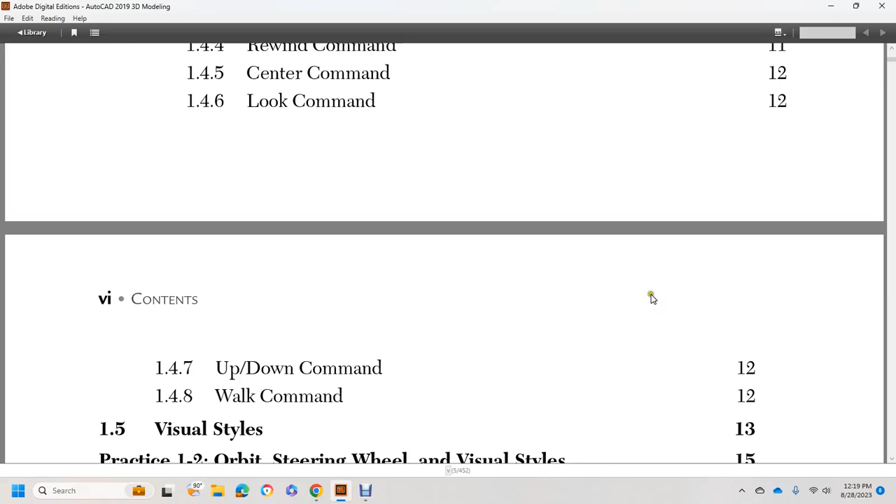Chapter 2, Creating Solids. Introduction to solids, 2.1, 2.2, creating solids using basic shapes: box command, cylinder command, cone command, sphere command, pyramid command, wedge command, torus command. Editing basic solid shapes using grips.

You edit basic solid shapes using quick properties and properties. 3D object snap, practice 2.1, basic solid shapes object snap.

2.6, using Boolean functions: union command, subtract command, intersect command, solid history. Using press pull command, 2.7. Practice 2.2, Boolean functions and press pull. 2.8, sub-objects and gizmos, culling, sub-object selection cycling, selecting user preset views.

Chapter 2, Creating Solids. In this chapter, we cover the 7 basic shapes, manipulating solids, the press pull command, 3D object snaps, and sub-object gizmos.

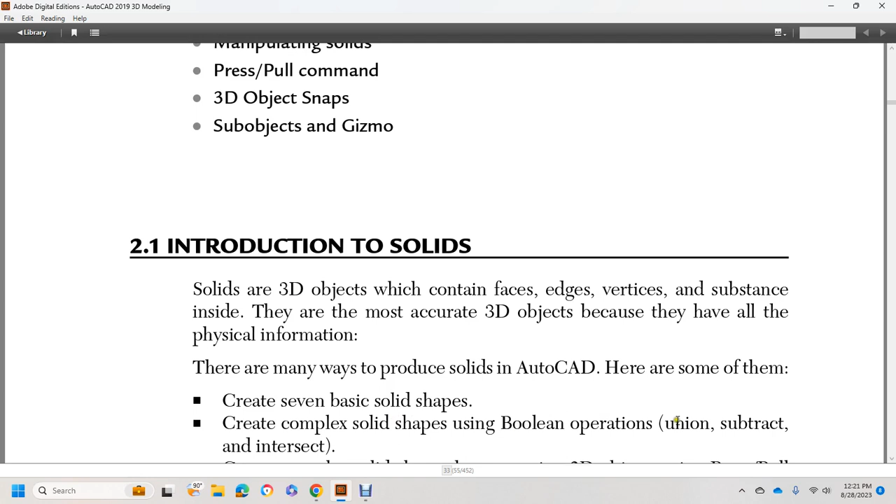Here are some of them: creating 7 basic solid shapes, creating complex solid shapes using Boolean operations (union, subtract, and intersect), creating complex solid shapes by converting 2D objects using the press and pull command, and creating complex solid shapes using sub-objects and gizmos. 2.2, creating solids using basic shapes.

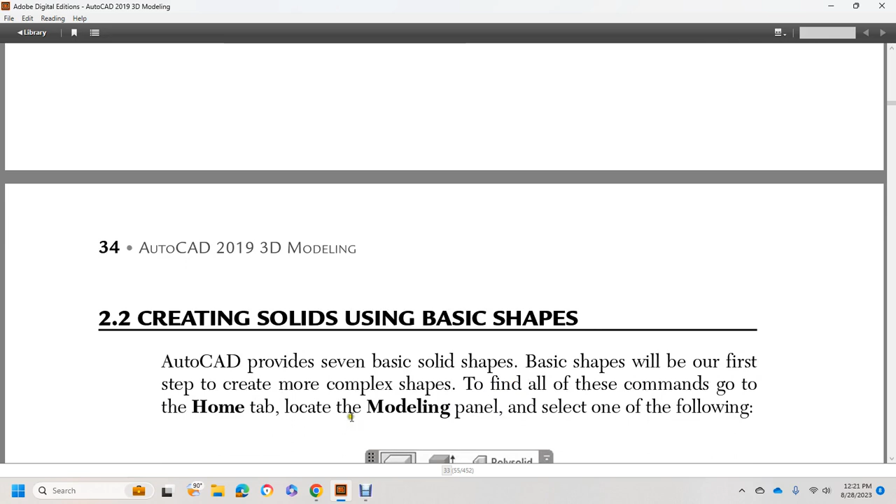AutoCAD provides 7 basic solid shapes. Basic shapes will be our first step to creating more complex shapes. To find all these commands, go to the Home tab, locate the Modeling panel, and select one of the following: box, cylinder, cone, sphere, wedge, pyramid, or torus. Here's a discussion of each command.

2.2.1, the box command. This command will allow you to create a box or cube. Choose the box command. Following the prompts, you will specify the first corner or center, specify the other corner or cube length, then specify height and/or 2 point.

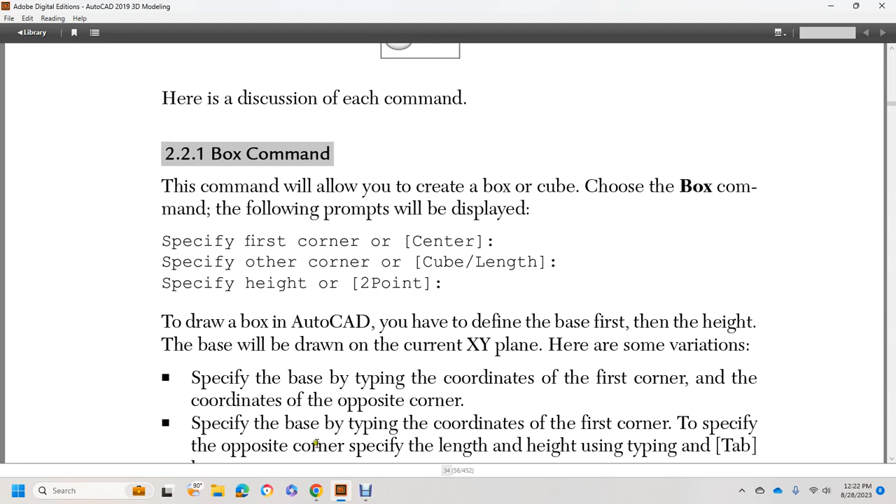To draw the box in AutoCAD, you have to define the base first, then the height, and the base will be drawn on the current XY plane. Here are some variations: specifying the base by typing coordinates of the first corner and of the coordinates of the opposite corner, or specifying length and height using the Tab key.

Specify the base by typing coordinates of the first corner, then type to specify the opposite corner. Specify the length and height using typing and the Tab key. Specify the base by specifying the first corner and length, then specify x-axis direction and width in the y-axis direction. Specify the base by specifying the first corner, then specify with the cube option. AutoCAD will ask you to input one dimension for all sides: length, width, and height.

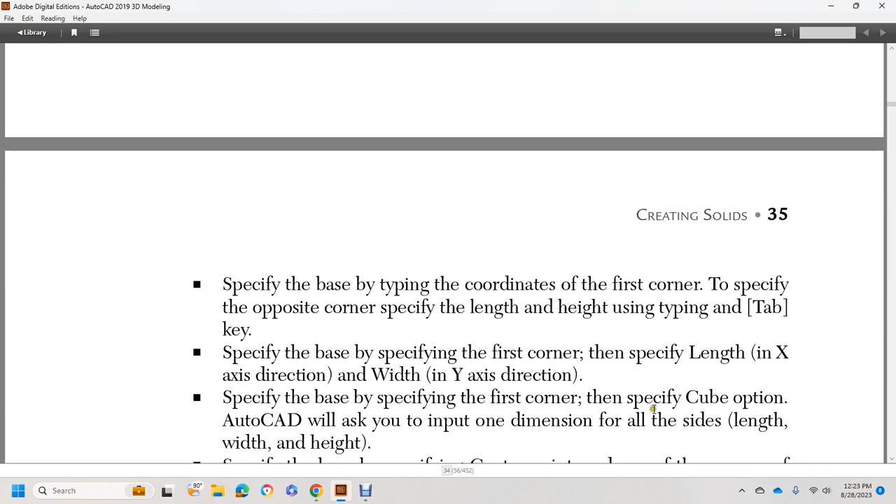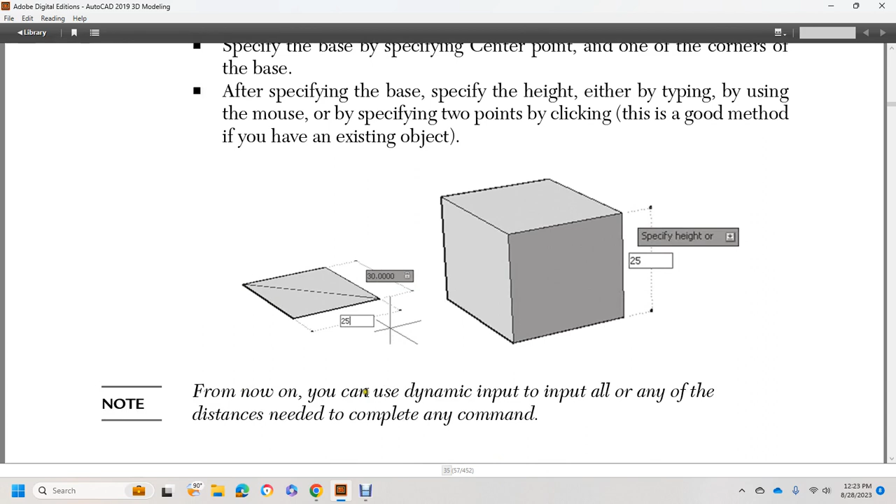Specify the base by specifying the center point, one of the corners of the base. After specifying the base, specify the height either by typing, using the mouse, or by specifying 2 points by clicking—this is a good method if you have an existing object. So here we looked at a cube. From now on, you can use dynamic input to input any of the distances needed to complete a command.

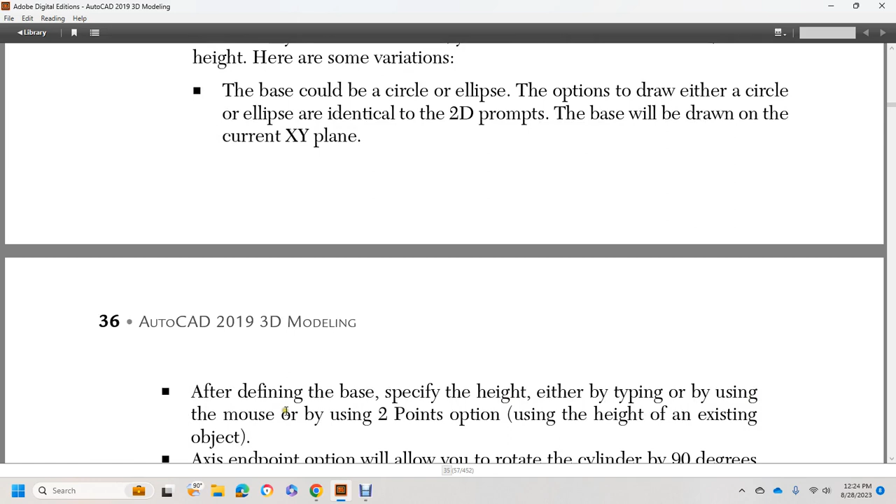Here are some variations: the base could be circular or ellipse. The options to draw either circle or ellipse will be identical to the 2D prompts. The base will be drawn on the current XY plane. After defining the base, specify the height either by typing or using the mouse, or by using the 2 points option using the height of an existing object.

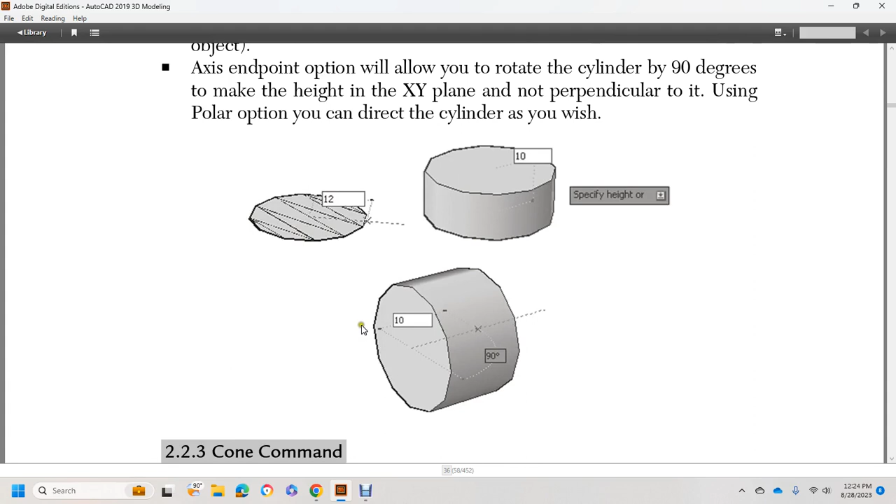The axis endpoint option will allow you to rotate the cylinder by 90 degrees, making the height not perpendicular to the XY plane. Using polar input, you can direct the cylinders as you wish. So we made our base and then pulled it and rotated it 90 degrees at the axis.

Cone command. This command will allow you to create a cone. Choose the cone command and the following prompts will display: specify center point of the base, 3-point, tangential radius, elliptical. Specify base radius or diameter. Specify height or 2-point axis, endpoint, top radius.

Cone and cylinder have identical prompts, so we won't discuss them again except for one thing: the cone command will allow you to draw a cone with a top radius.

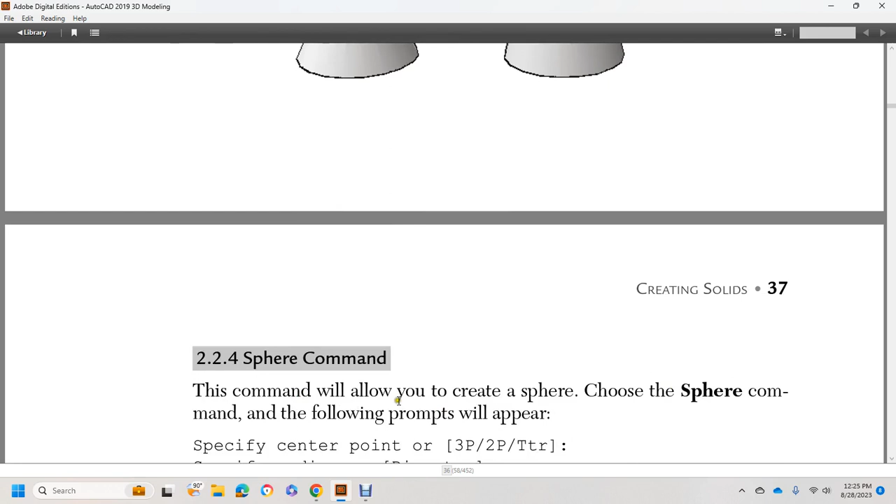Sphere command. This command will allow you to create a sphere. Choosing the sphere command, the following prompts will appear: specify center point, 3 point, tangential radius, specify radius and diameter. The prompts are identical to the circle command.

2.2.5, the pyramid command. This command will allow you to create a pyramid. Choose the pyramid command and the following prompts will appear: four-sided circumscribed, specify center point of base, edges, and sides, specify radius, base radius, or inscribed height, specify height or 2 point axis, end point, top radius.

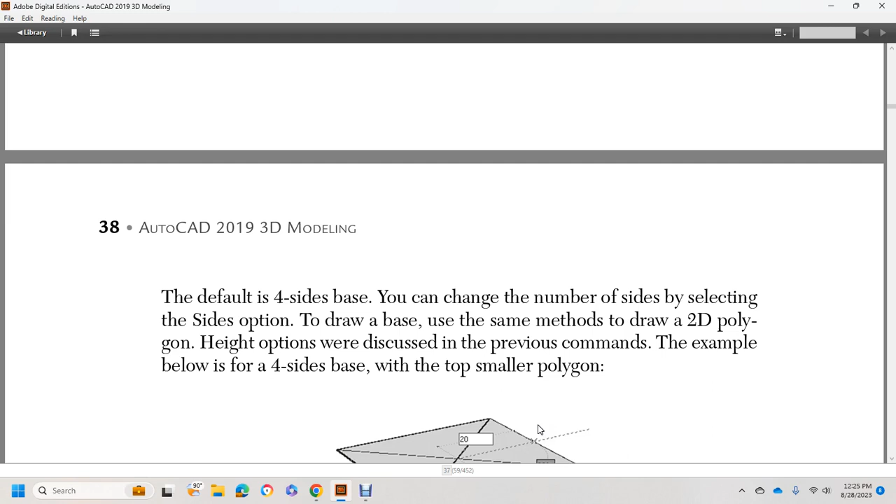Default is a 4-side base. You can change the number of sides by selecting the side option. Draw the base using the same method as drawing a 2D polygon. Height options were discussed in previous commands. These examples below show a 4-sided base for the top, smaller polygon.

2.2.6, the wedge command. This command will allow you to create a wedge. Choose the wedge option and the following prompts will be displayed: specify first corner center, specify other corner cube or length, specify height or 2 points.

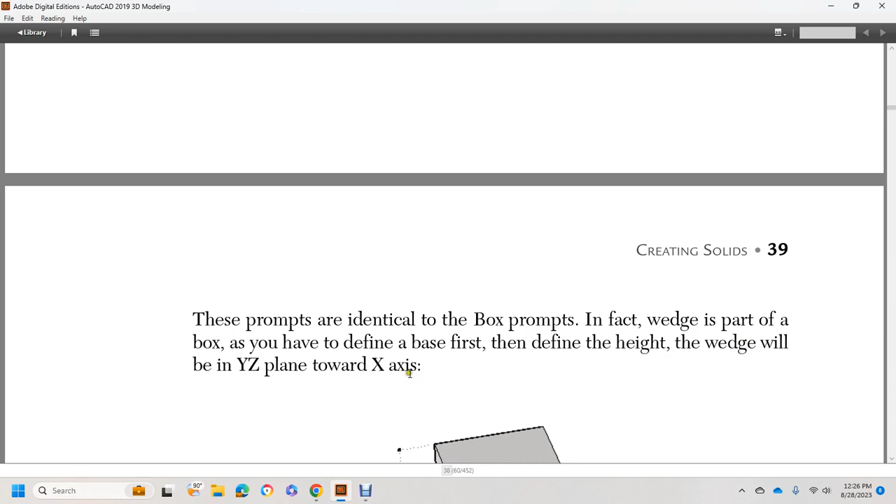These prompts are identical to the box prompt, and in fact the wedge is part of a box. If you define the base first, then to define the height, the wedge will be in the YZ plane toward the X-axis. So here's a wedge.

2.2.7, the torus command. This command will allow you to create a torus. Choosing the torus option, the following prompts will appear: center point, specify center point, 3 point, TTR, specify radius, diameter, tube radius, and specify tube radius or 2 point diameter. Specify center and radius diameter of the torus, and specify the radius or diameter of the tube.

Check the following illustration showing the tube diameter and the torus diameter.

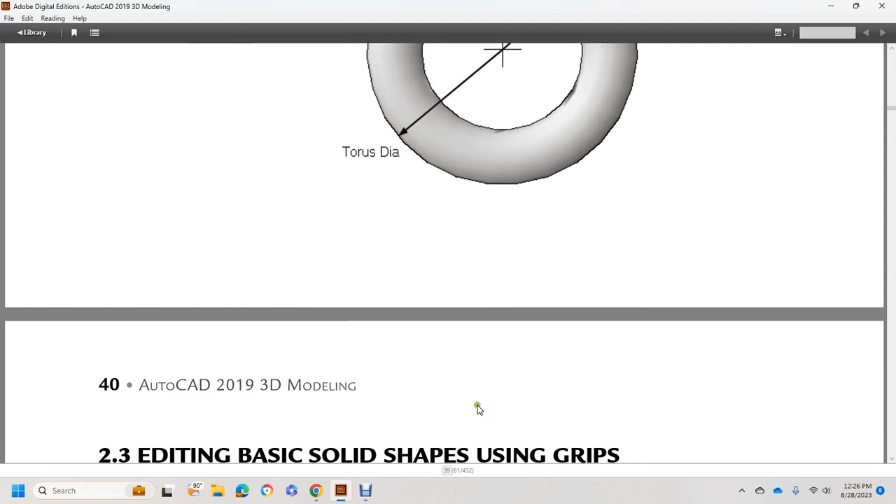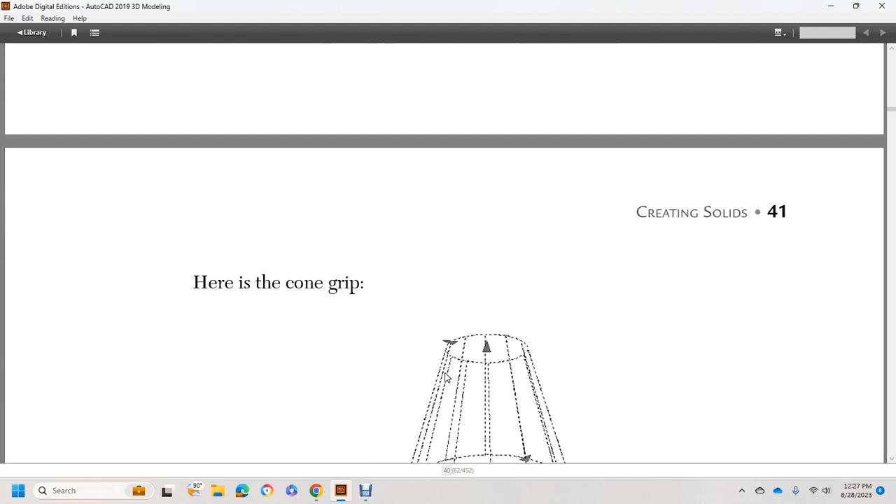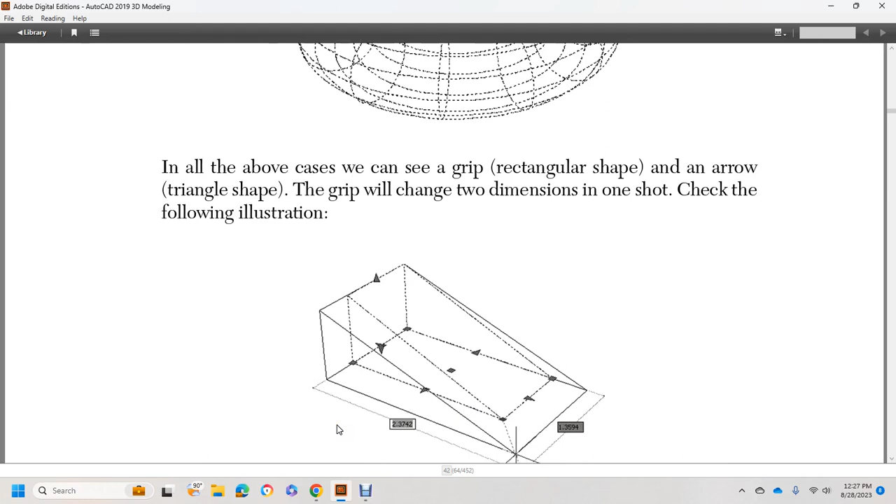In all the above cases, we can see that the rectangular-shaped grip and the arrow-shaped triangular grip will change 2 dimensions in one shot. Check the following illustration showing that with the rectangular shape and the arrow with the triangular shape, the grip will change 2 dimensions in one shot.

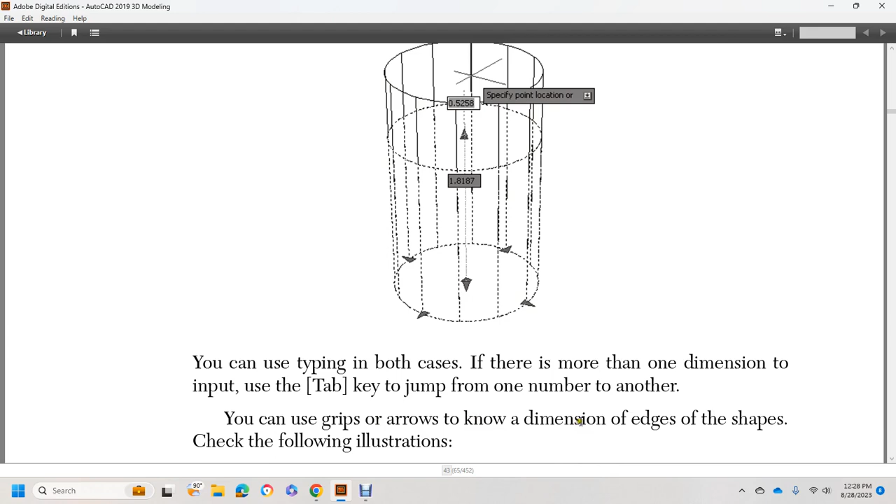The arrow will change dimension in one direction like the following. You can use both cases if there's more than one dimension to input. Use the tab key to jump from one to another. Using grips, arrows allow you to dimension edges and shapes. Check the following illustrations.

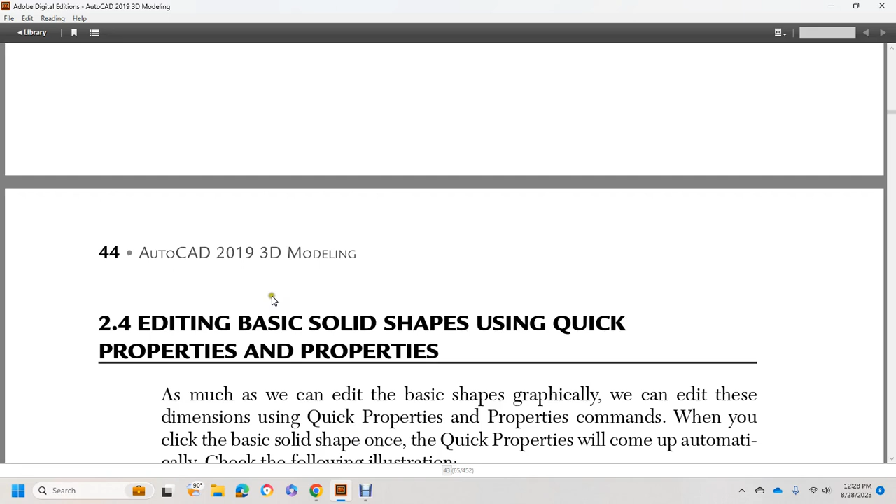2.4, editing basic solid shapes using quick properties and properties. As much as we can edit basic shapes graphically, we can also edit these dimensions with the quick properties command. When you click the basic solid shape once, quick properties will come up automatically. Check the following illustration: color, layer, elliptical radius, and height, and that it's a 3D solid.

The above is a cylinder shape. You can change the radius and height, and change the base from being a circle to an ellipse. To activate Properties, select the desired shape, right click, then select the property option.

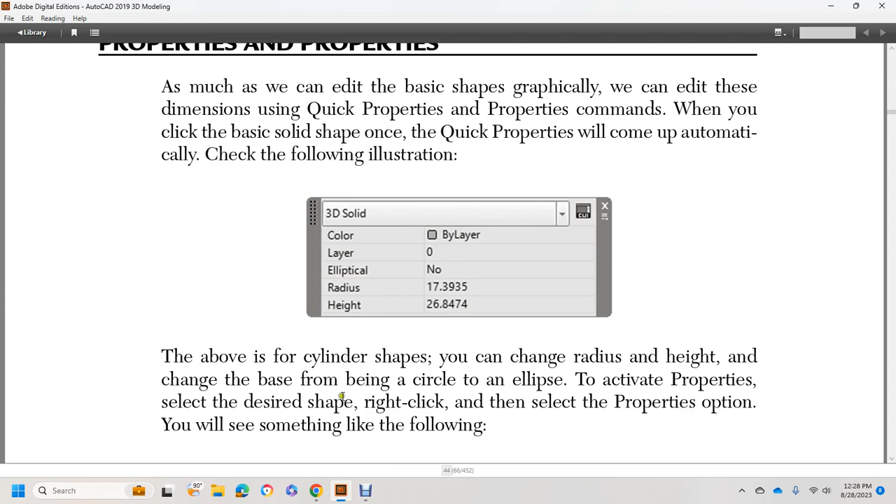You'll see something like the following: 3D solid, general color, layer, line type, scale, plot type, line weight, transparency, hyperlink, visualization material by layer, solid type, position X, Y, Z, elliptical radius and height, solid history, and show history.

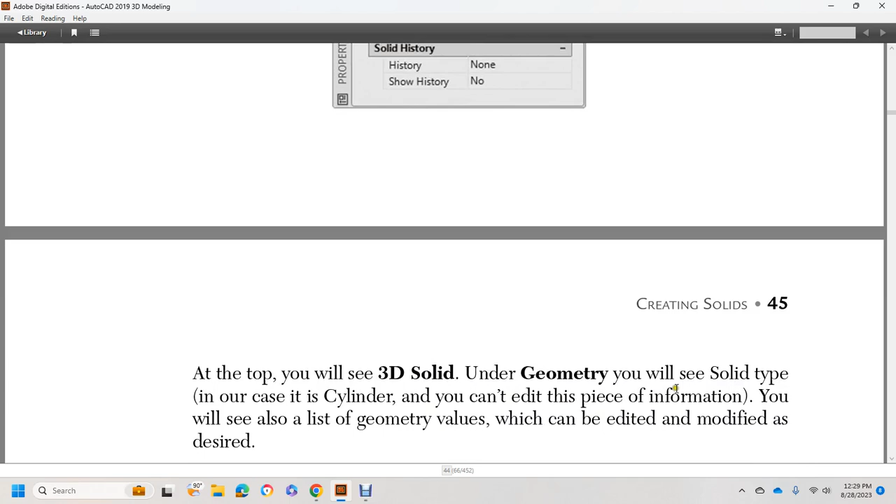At the top, you'll see 3D solid. Under geometry, you'll see solid type, which in our case is cylinder. You can't edit this piece of information. You will also see the list of geometry values, which can be edited and modified as desired.

2.5, 3D Object Snap. The 3D Object Snap is similar to Object Snap, but only works with 3D objects. It will help you snap onto 3D objects. As a first step, you switch 3D Object Snap on and off from the status bar, which snaps the cursor to 3D references.

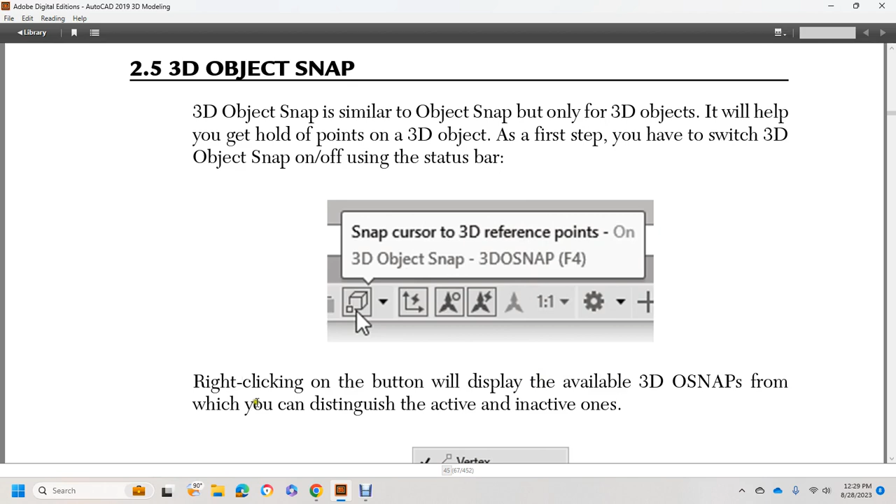The shortcut key is F4, command name 3D OSnap. Right clicking on the button will display the 3D OSnap options, from which you can distinguish the active and inactive ones: vertex, midpoint, center, face, knot, perpendicular, nearest to face, and object snapping settings.

Select the settings option and you will see the following dialog box: snap grid, polar track, object, 3D object snapping. 3D object snapping on, shortcut key F4: vertex, midpoint, center, face, knot, perpendicular, nearest to face, point cloud, node, intersection, edge, corner, nearest to plane, perpendicular, edge, center line. OK, cancel, help. You can turn on and off the desired modes.

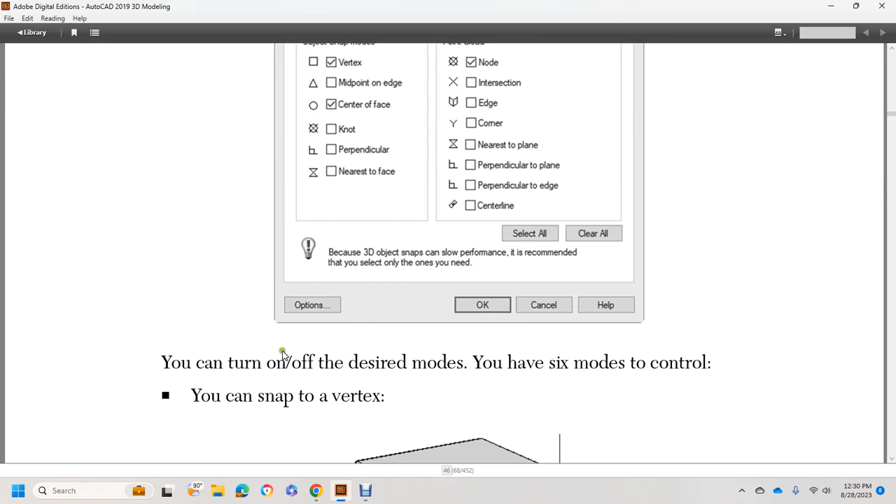You have 6 modes to control. You can snap to a vertex.

You can snap to a midpoint on the edge. You can snap to a center of the face. You can snap to a knot or a spline. You can snap to a point perpendicular to the face. You can snap to a point very nearest to your selected point.

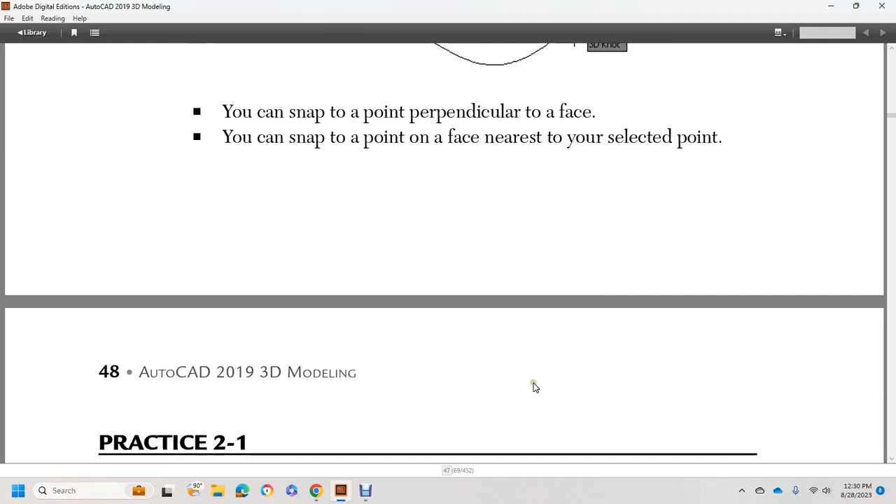Practice 2-1: Basic solid shape 3D object snaps. Start AutoCAD 2019, open practice 2-1 drawing file. Create a pyramid with 4 base sides, circumscribed radius 30 at top, side radius 15, height 25.

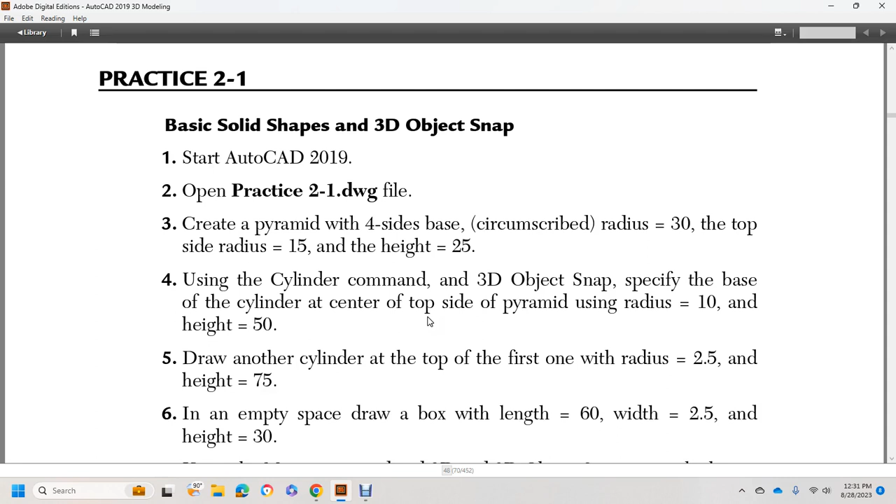Using the cylinder command with 3D object snap, specify the base of the cylinder at the center of the top side of the pyramid, using radius equal 10, height 50. Draw another cylinder on top of the first one, radius 2.5, height 75. In empty space, draw a box with length 60, width 2.5, and height 30.

Using the move command with 3D object snap, move the box to the upper cylinder to get the following result - it kind of looks like a flagpole.

Using any of the edit methods, change the radius of the top cylinder to be 5, change the width of the box to 5, save and close.

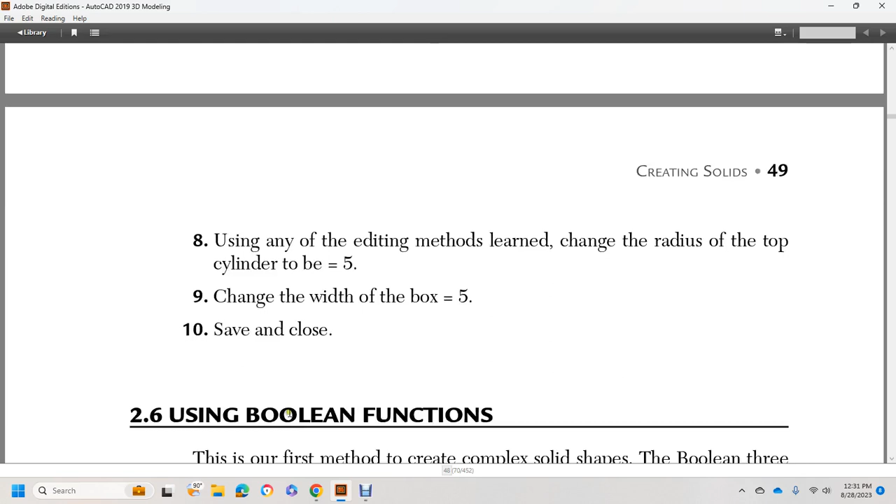Using Boolean functions - this is our first method to create complex solid shapes. The 3 Boolean functions are union, subtract, and intersect. To issue these commands, go to the home tab, locate the solid editing panel - the 3 buttons to the left of the target are shown below: extract edges, extrude faces, separate.

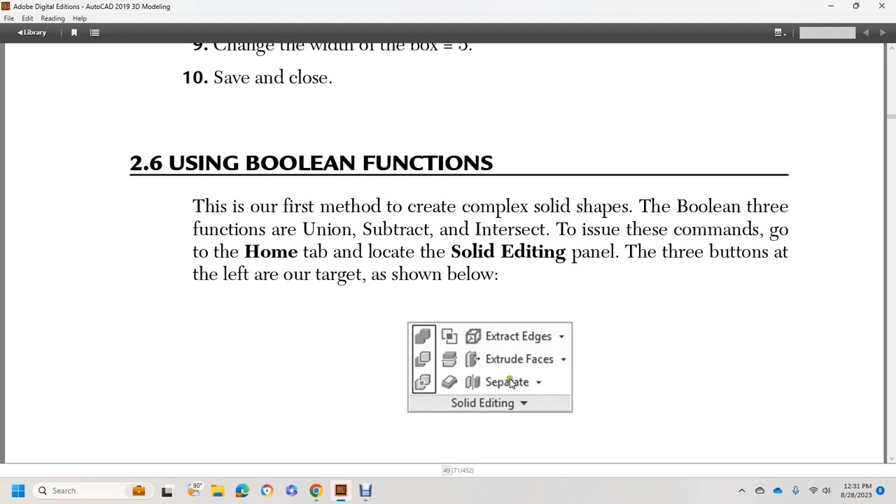The union command will allow you to union all selected solids and surfaces into a single object. You can pick up the objects in any order you want, then press enter. Check the following example showing before union and after union.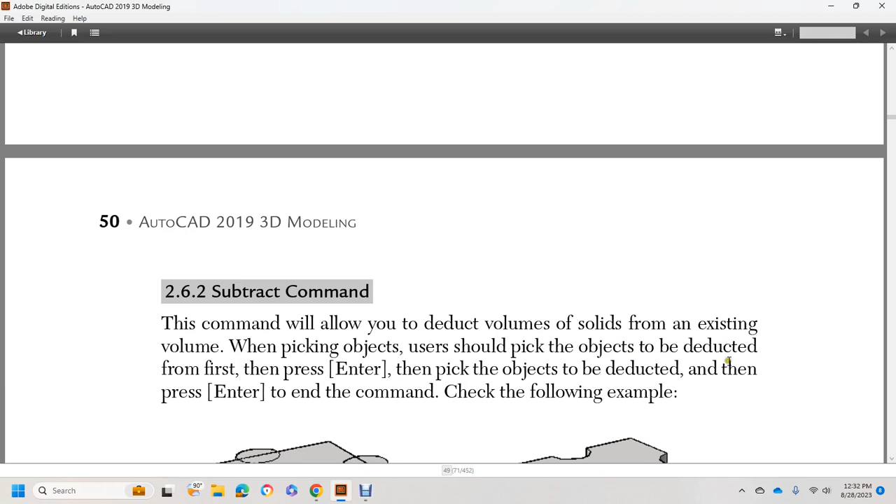The subtract command will allow you to deduct volume solids from an existing volume. When picking objects, you should pick the objects to be deducted from first, then press enter, then pick the objects to be deducted, then press enter to complete the command. Check the following example showing before and after subtraction.

The intersect command will find and create the common volume between 2 solids or more. Pick the solids in any order you want. Check the following example.

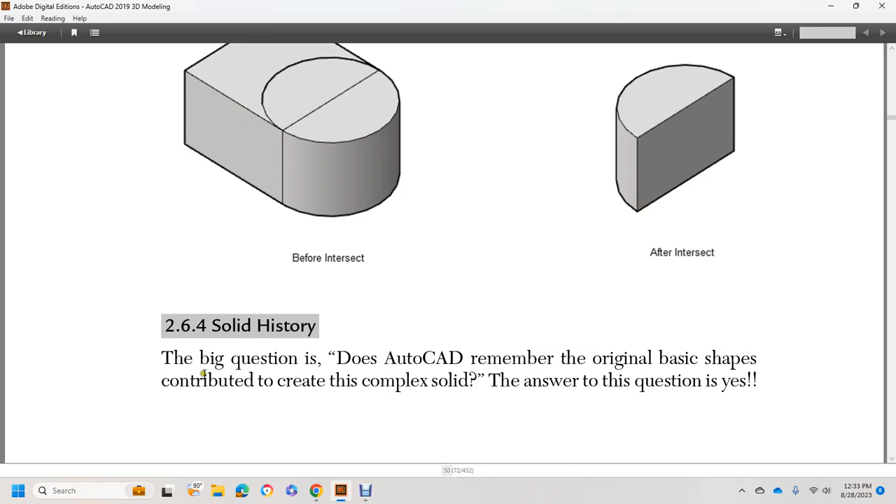Before intersection, after intersection - solid history. The big question is, does AutoCAD remember the original basic shapes that contributed to creating the complex solid? The answer is yes. In order to succeed with this, you should use the following steps.

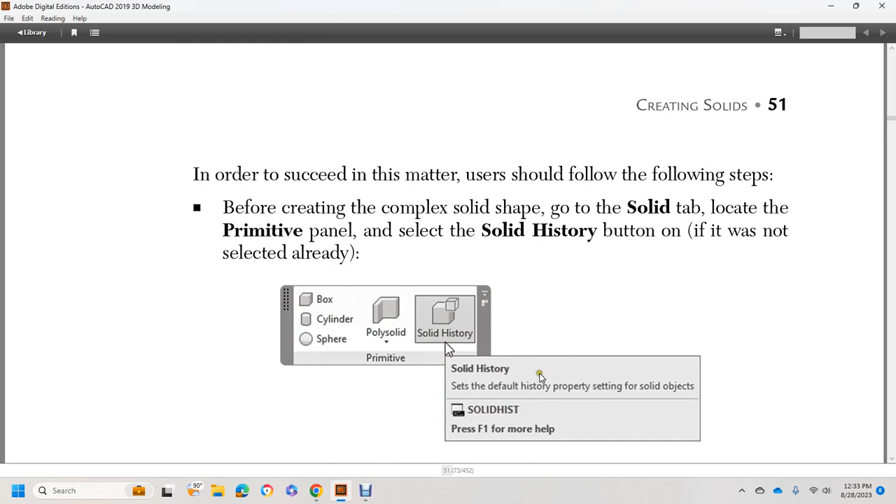Before creating complex solid shapes, go to the Solid tab, locate the primitive panel, select the Solid History button if it was not already selected. Solid history, as in the command SOLIDHIST, sets the default history setting for solid objects. Create your complex solid shape, then select the complex solid to access its properties palette.

Under solid history, make sure that history equals record. Check the following illustration: solid history equals record, show history equals no.

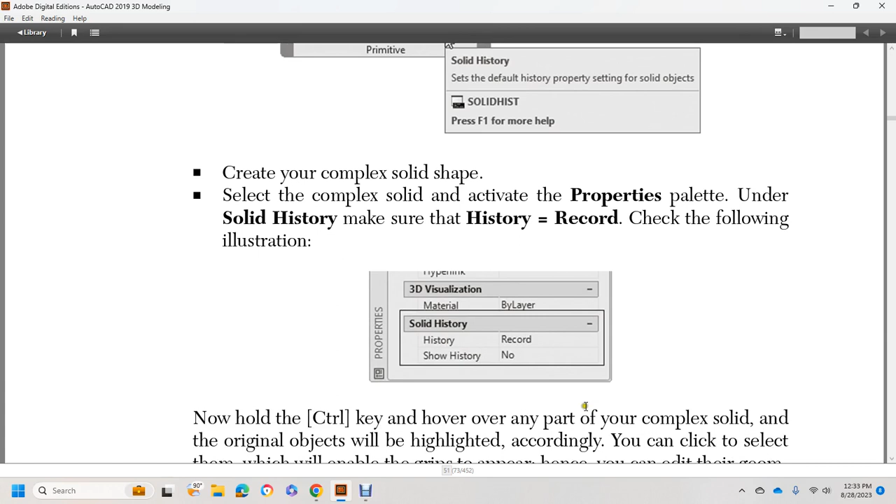Now hold the control key and hover over any part of the complex solid - the original object will be highlighted accordingly. You can select them, and it will engage the grips to appear, and hence you can edit the geometry values. Check the following illustration.

Using properties, if you see that show history equals yes, all solids that contributed to creating the complex solid will be displayed, but unfortunately the user can't edit them in this state. To edit them, you need to hold the control key as we did previously. Check the following illustration.

2.7 - Using the press pull command. The press pull command is a very handy command which will help you create 3D solids on the fly. The user can do one of the following procedures.

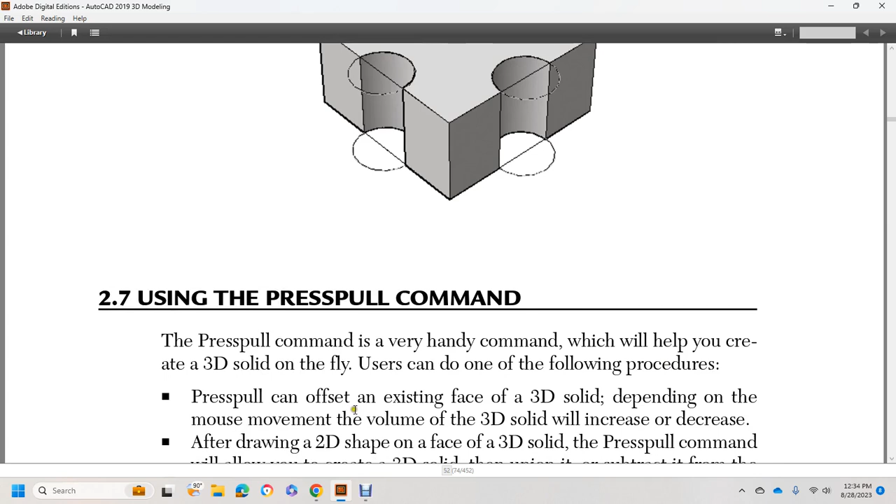Press pull will offset an existing face of a 3D solid depending on the mouse movement - the volume of the 3D solid will increase or decrease. After drawing a 2D shape on the face of a 3D solid, the press pull command will allow you to create a 3D solid to union or subtract it from the existing 3D solid.

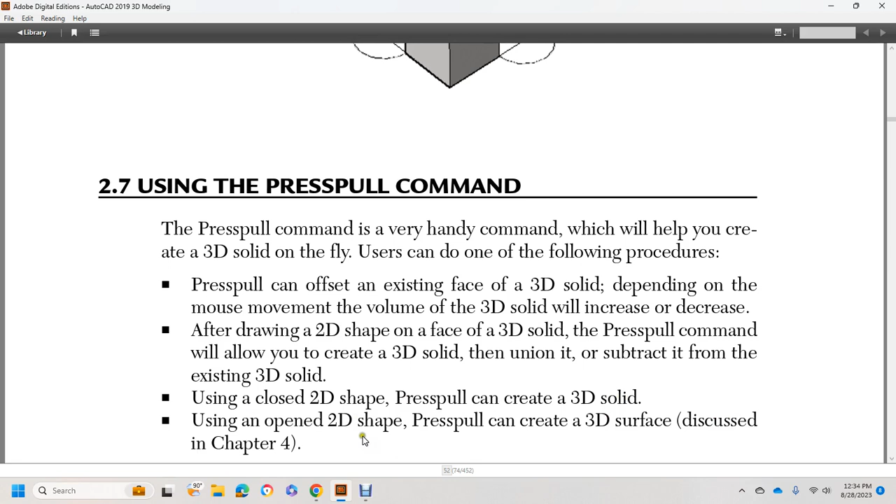Using a closed 2D shape with press pull creates a 3D solid. Using an open 2D shape with press pull creates 3D surfaces, discussed in Chapter 4. The press pull command has multiple options.

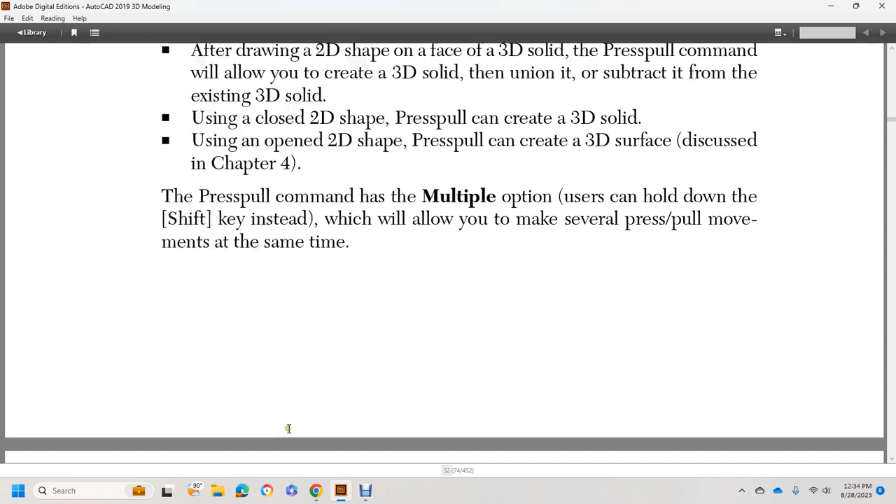The user can hold down the shift key instead, which will allow them to make several press pull movements at the same time. To issue the command, go to the home tab, locate the modeling panel, select the press pull button - the command is PRESSPULL.

Press pull on bounded areas - you'll see the following prompts: select object or bounded area, specify extrusion height or multiple. The command will keep repeating these 2 prompts until you end it by pressing enter.

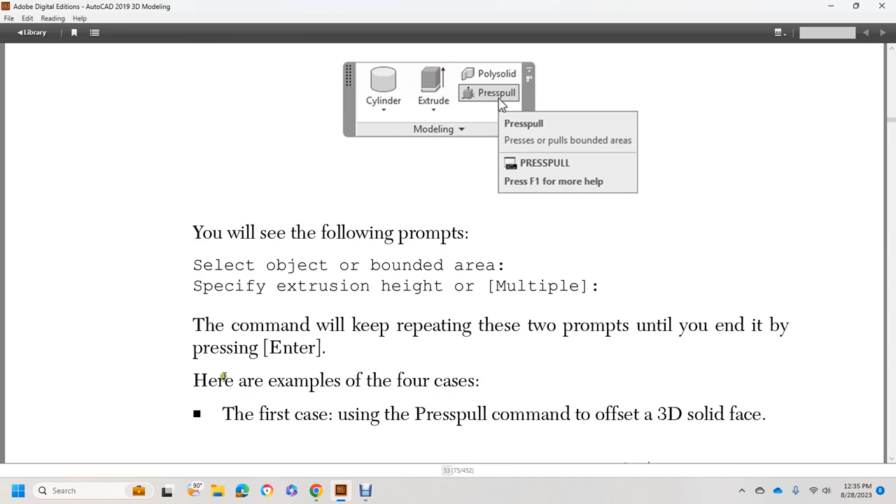Here are examples of the 4 cases. The first case uses the press pull command to offset a 3D solid face. Specify the extrusion height, and then you have the little X mark on your triad.

Second case: after drawing a 2D object on a 3D solid face, you can press pull the 2D shape to add or remove volume using the press pull tool on a 3D solid.

Third case: press pull a closed 2D object to produce a 3D solid.

Fourth case: press pull an open 2D object to produce a 3D surface.

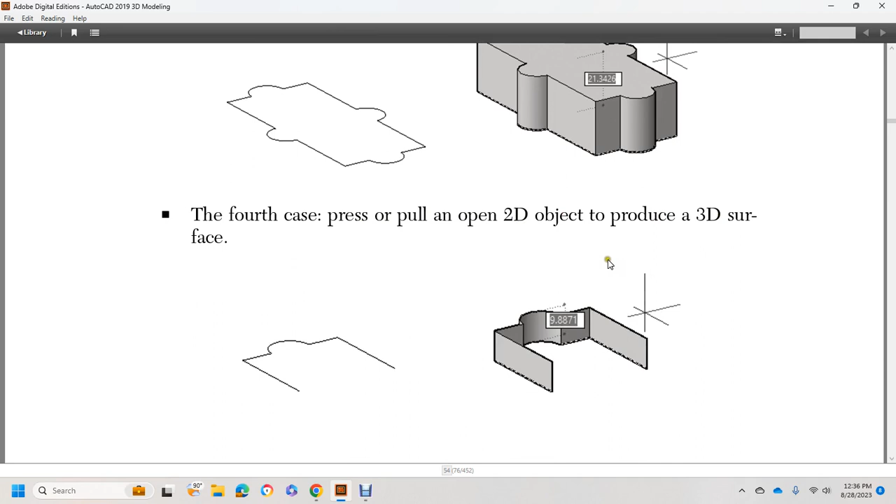Using multiple options, you can hold the Shift key to select several objects—open 2D, closed 2D, or 3D solid face—and press pull them all in one shot. You can use the Control key to control the output of the command.

Let's see the following example: without holding the Control key, and then holding the Control key. In the first case, the press pull offsets the face perpendicular to the existing face. While holding the Control key, press pull offsets following a taper angle.

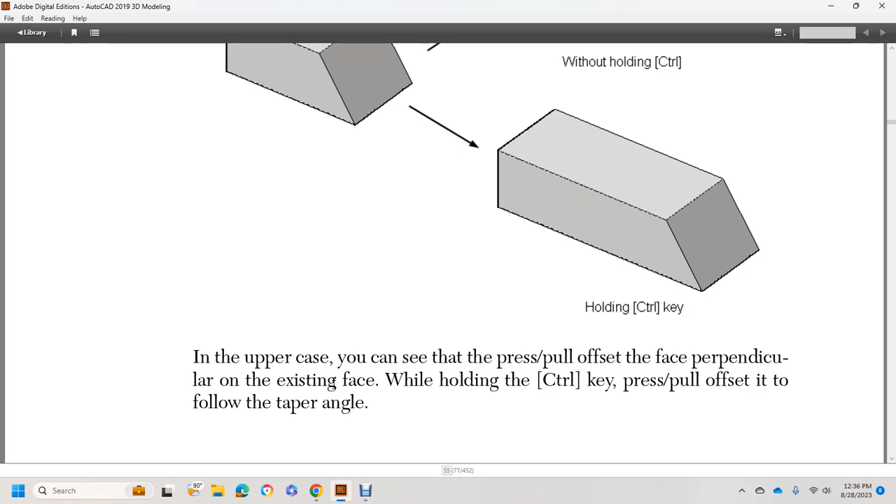Practice 2-2, Boolean functions: press pull. Start AutoCAD 2019 and open the practice 2-2 drawing file.

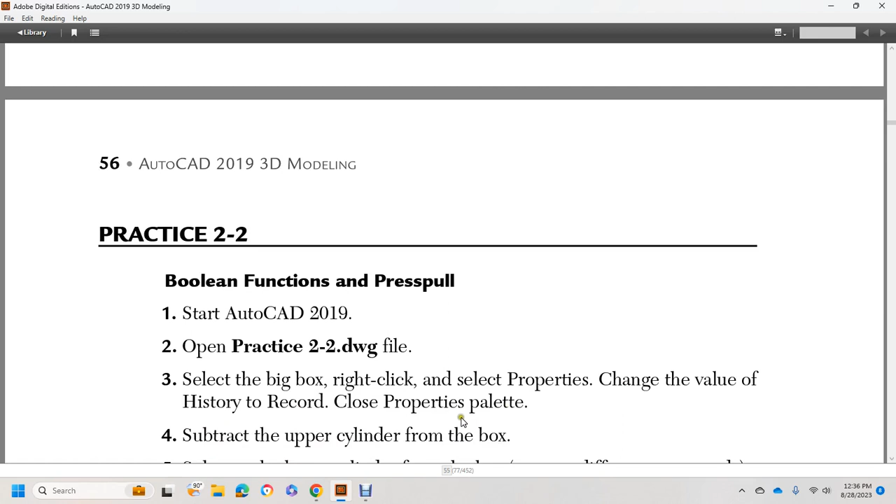Select the big box, right click, select Properties, and change the value of the history record in the Properties palette. Subtract the upper cylinder from the box, then subtract the lower cylinder from the box.

This is 10 units added to the current radius. You use the same technique for the lower cylinder, also 10 units, but this time you remove 10 units from the current radius.

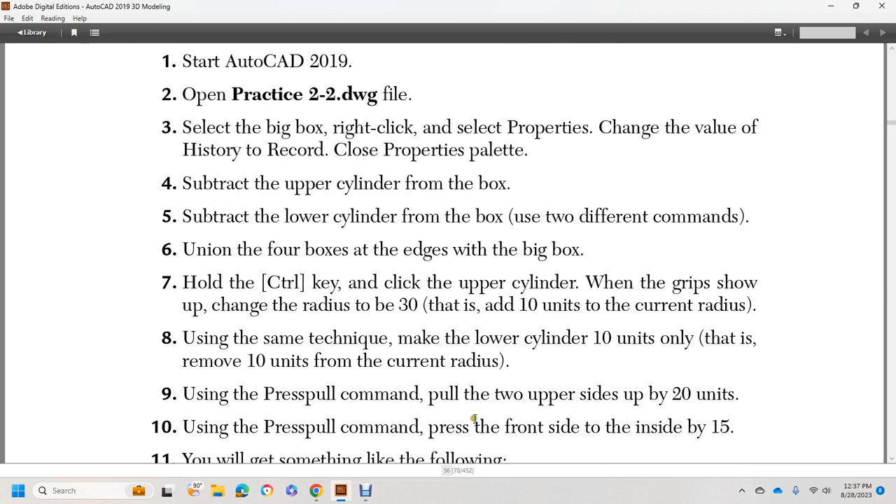Use the press pull command to pull the two upper sides up by 20 units. Using the press pull command, press the front side inside by 15. You'll get something looking like the following.

You need to use Subtract. Then with the press pull command, pull the two rectangles on the left side outward by a distance of 15.

Using the press pull command, pull the open shape up by 60 units. Select the new shape type. This is the final shape. Save and close the file.

2.8: sub-objects and gizmos. A sub-object is any part of a solid—it can be a vertex, edge, or face. A gizmo is a gadget that helps you move, rotate, and scale selected vertices, edges, and faces.

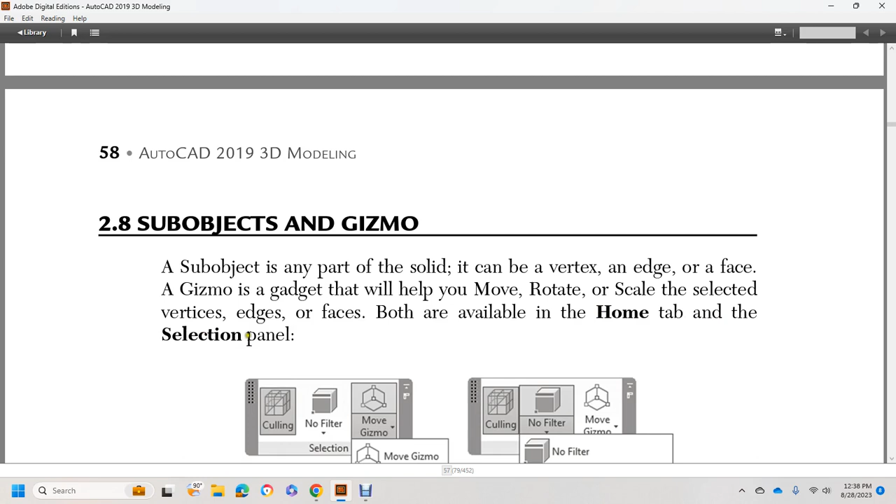Both are available in the Home tab, Selection panel, showing culling, no filter, and selection gizmo options. You have Move gizmo, Rotate gizmo, Scale gizmo, No gizmo, and then a filter for vertex, edge, face, solid history, and drawing view component.

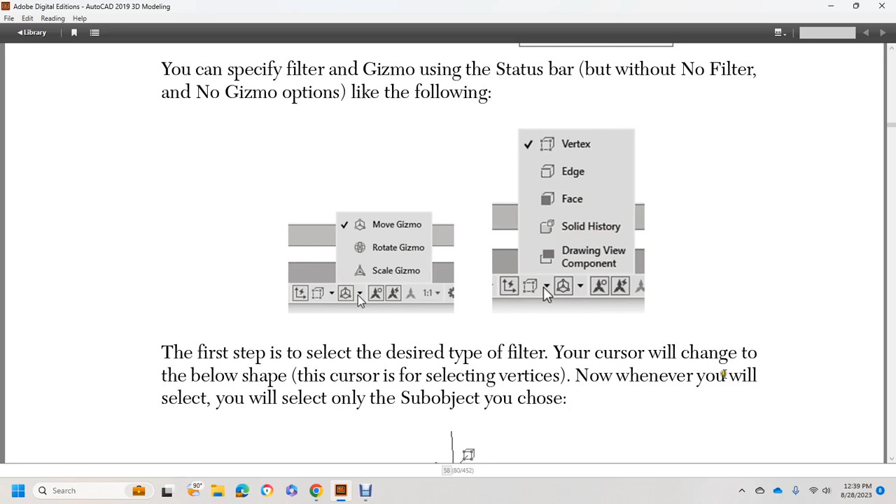Your cursor changes to select the below shape; it's now selecting the vertex. Whenever you select, you will select only the sub-objects you choose—for example, vertices, edges, and faces.

When selecting, there are three things you can take care of, the following being culling. Culling is a very useful feature—it allows you to select only sub-objects visible from the current viewpoint.

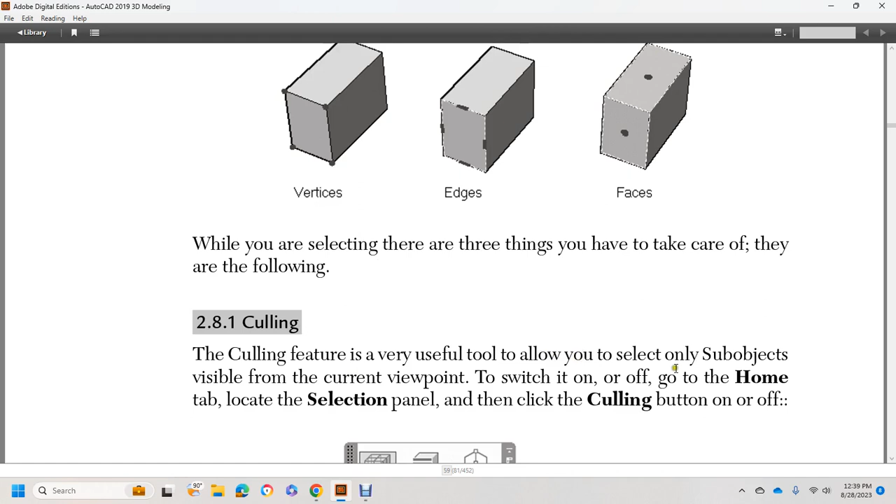To switch it on and off, go to the Home tab, locate the Selection panel, and click the Culling button on and off—this controls whether objects are hidden from view or highlighted when you roll over them. The command is CULLINGOBJ; press F1 for more help.

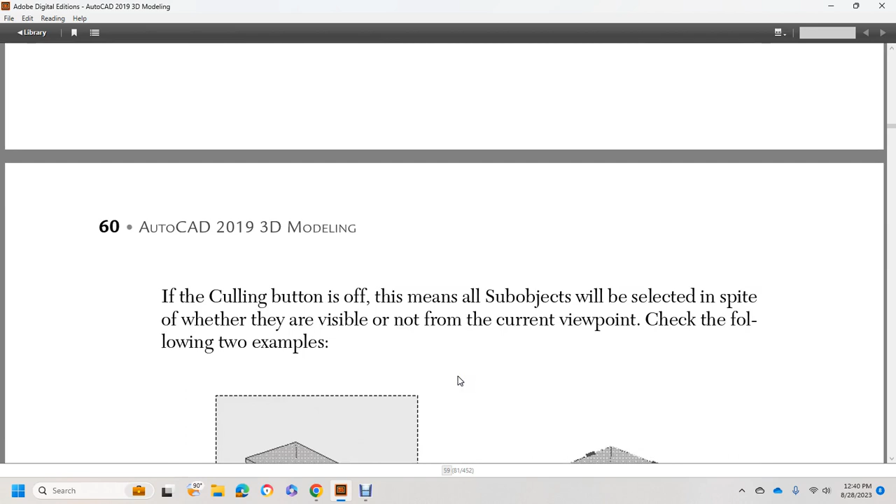When the Culling button is off, sub-objects will be selected regardless of whether they are visible from the current viewpoint. Checking the following two examples: with culling on, we have all these edge points.

With culling off, you have a different set of edges.

Selection cycling: when you click on a face, you may have another face behind it. AutoCAD will allow you to pick exactly what you intended to select, showing a small window called the Selection list, which includes all objects that exist in the same space as the click.

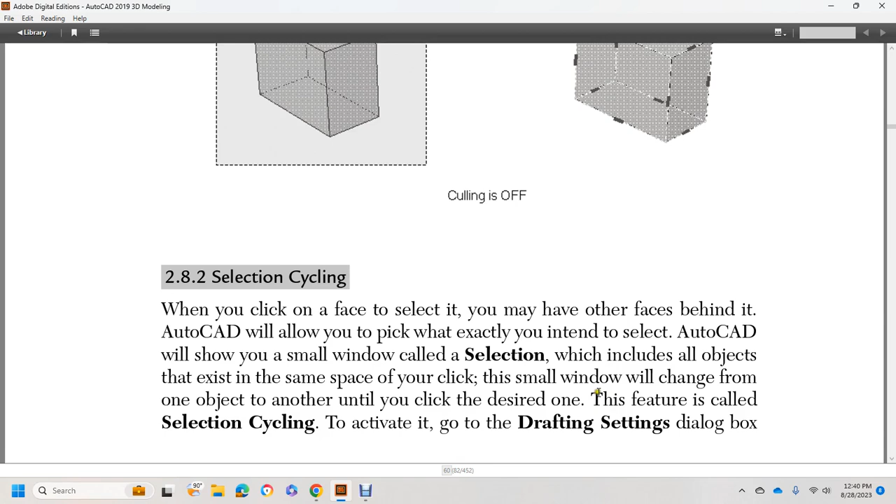The small window will change from one object to another until you click the desired one. This feature is called Selection Cycling; to activate it, go to the Drafting Settings dialog box, which also controls Snap, Grid, Osnap, and select the Selection Cycling tab.

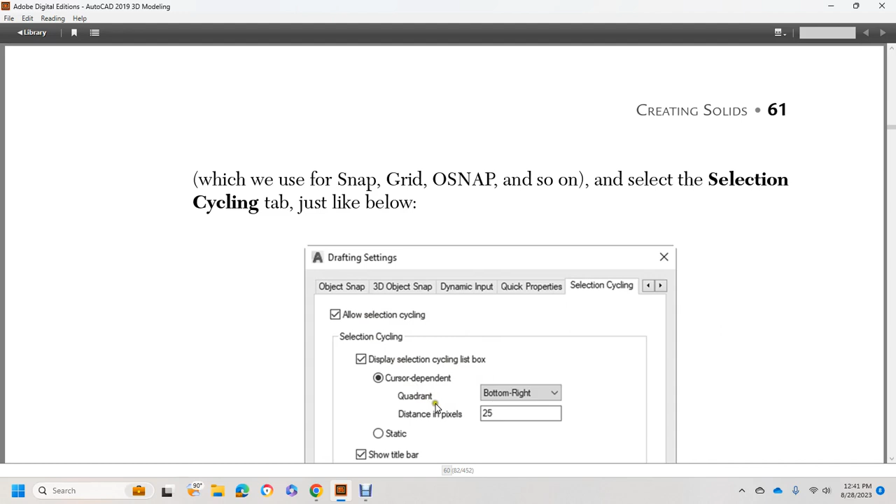We go to Drafting Settings and look at Selection Cycling: allow selection cycling, display selection cycling list box options like cursor dependent, quadrant bottom right, distance in pixels, static, and show bar, then Options, OK, and Help.

Here's an example: assume you have a pyramid and click the top face as shown. Once we've made our selection, it shows solid faces 1 and 2, and none.

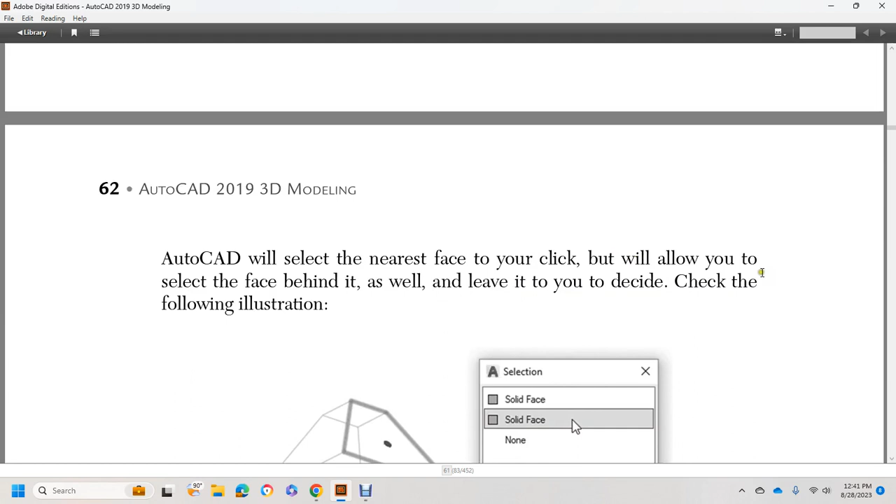AutoCAD will select the nearest face to your click, but it will allow you to select the face behind it as well, and leave it to you to decide. Check the following illustration. This applies to edges as well.

Selecting using preset views: use only preset views to enable selecting multiple sub-objects. The following steps will clarify the concept. Click Culling off using the view cube, go to the top view from the sub-objects panel, select edge. Without issuing the command, window the edges on the right side and the left side of the box, just like the following.

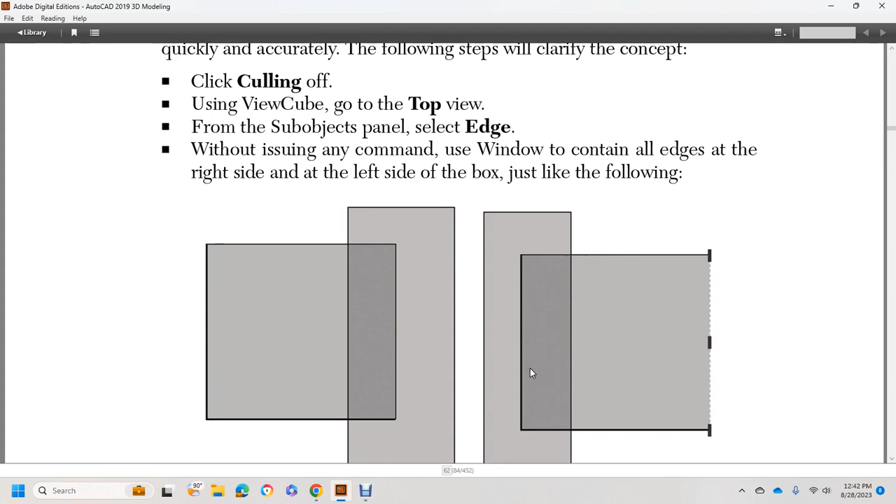Using the view cube, changing to the 3D preset views, you will see something like the following.

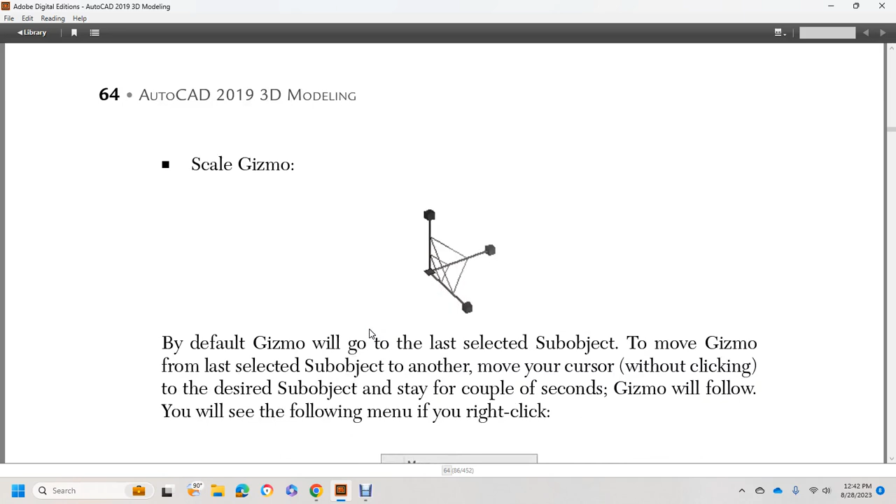Using a gizmo: after selecting the desired sub-objects, you can choose the needed gizmo to change sub-objects. There are 3 gizmos to select: move gizmo, rotate gizmo, and scale gizmo.

By default, the gizmo will be on the last selected sub-object. To move the gizmo from the last sub-object to another, move your cursor without clicking to the desired sub-object and stay a couple seconds. The gizmo will follow, and you'll see the following menu.

Right-click to see: move, rotate, scale, set constraint, relocate gizmo, align gizmo, custom gizmo, respect dynamic UCS, user coordinate system. This menu allows you to change the gizmo command, set constraints, set the axis or plane to be used, relocate, align, and customize the gizmo.

The move gizmo consists of 3 axes. Move the selected sub-objects along one of them, namely X, Y, or Z, or along a plane formed by two of them: XY, YZ, or XZ. When one of the 3 axes highlights, it becomes golden; click and move. Use the right-click menu to set the desired axis using the constraint option. Check the following illustration.

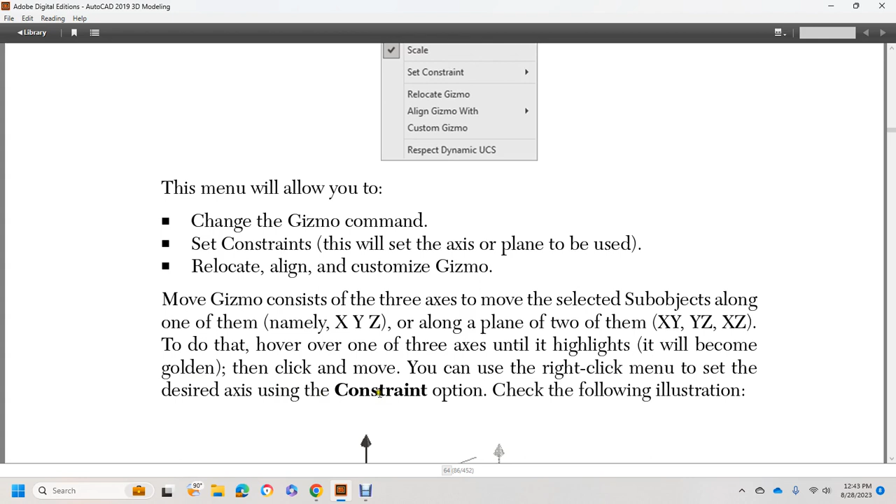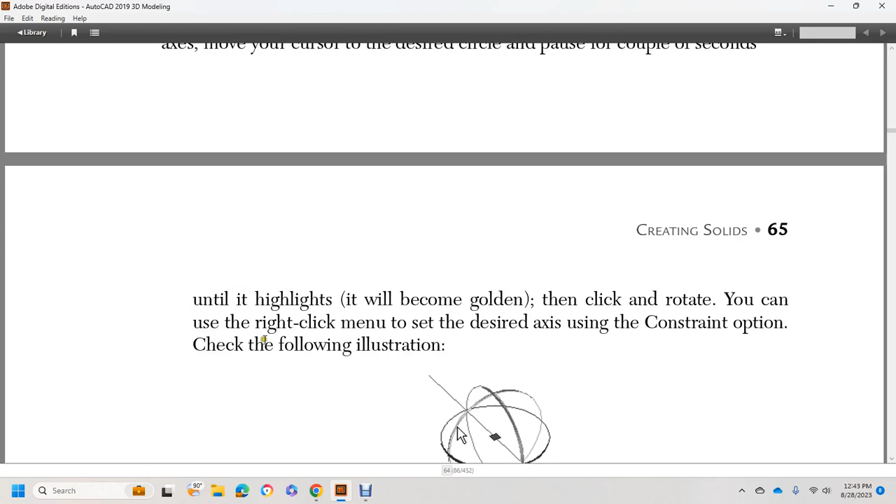The rotate gizmo consists of 3 circles. To rotate around one of the 3 axes, move the cursor to the desired circle and pause a couple seconds until it highlights and becomes golden, then click to rotate. You can use the right-click menu to set the desired axis using the constraint option. Check the following illustration.

The scale gizmo consists of 3 axis scales, helping you select X, Y, Z, or planes XY, YZ, XZ, or all of X, Y, and Z. Move the cursor to the desired point, pause for a couple seconds, and the plane will highlight and become golden. Click to scale. You can use the right-click menu to set the desired axis using the constraint option. Check the following illustration.

The gizmo will act not only on sub-objects but also on solid shapes, following these steps: make sure the sub-object filter is set to no filter, make sure culling is off. You can also see all the grips.

When you click the solid shape, the gizmo will appear in the center of the shape; this will be your base point. If you want to use another base point, relocate the gizmo by selecting the other grip for the new base point, then execute the desired command. Check the following illustrations.

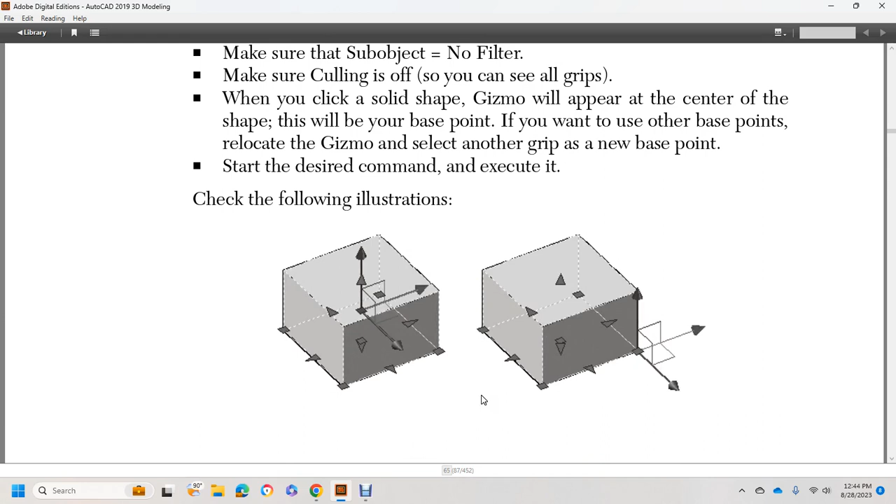Practice 2-3: sub-objects and gizmos. Start AutoCAD 2019 and open the Practice 2-3 drawing file. Using sub-object face, move the upper face 5 units up. Using the same face, rotate it around X in the red circle by 15 degrees. Select the edge shown and move it outside by 5 units.

Save and close the file.

Alright, we're going to skip them. Well, let's go ahead and read it.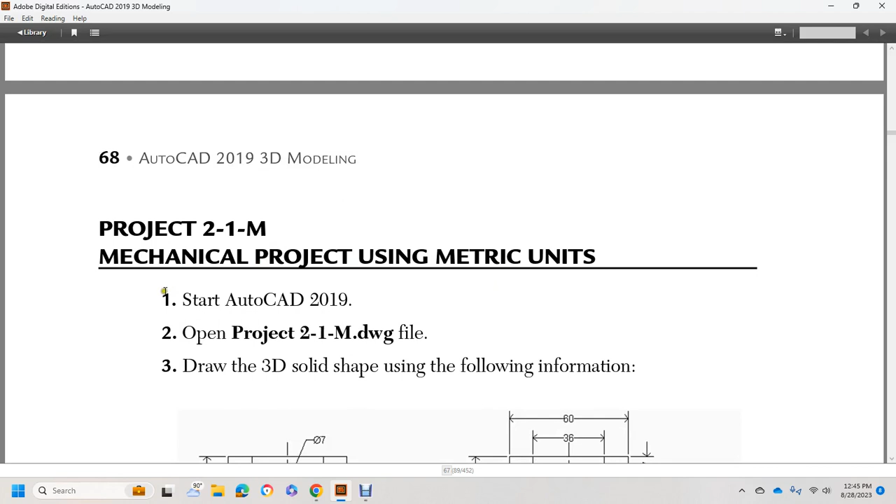2-1 Mechanical Project, metric units. Start AutoCAD, open the project 2-1M drawing. Draw the 3D solid using the following information. The final shape should look like the following.

Save and close. 2-1 Mechanical Project, imperial units. Open project 2-1I. The drawing unit should be as follows, and the final shape should look like the following. Save and close the file.

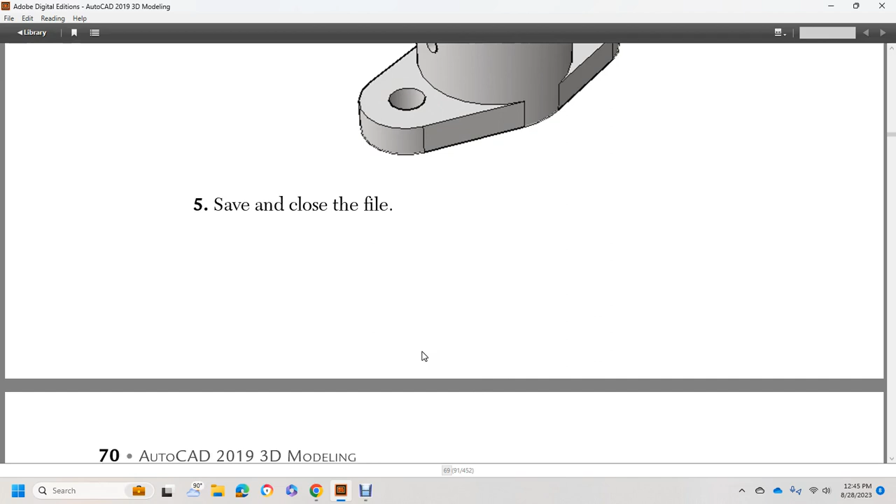Project 2-2-M: Architect Project using metric units. Start AutoCAD 2019 and open the project 2-2-M drawing file. Make sure the visual style is 2D wireframe.

Create a new layer called 3D Wall, set the color to 9, and make it current. Use the press-pull command to pull the outside wall up by 3,000 units, making sure the door and window openings are kept.

Create a new layer called 3D Door, set the color to 8, and make it current. Draw the outer depth of the door jamb.

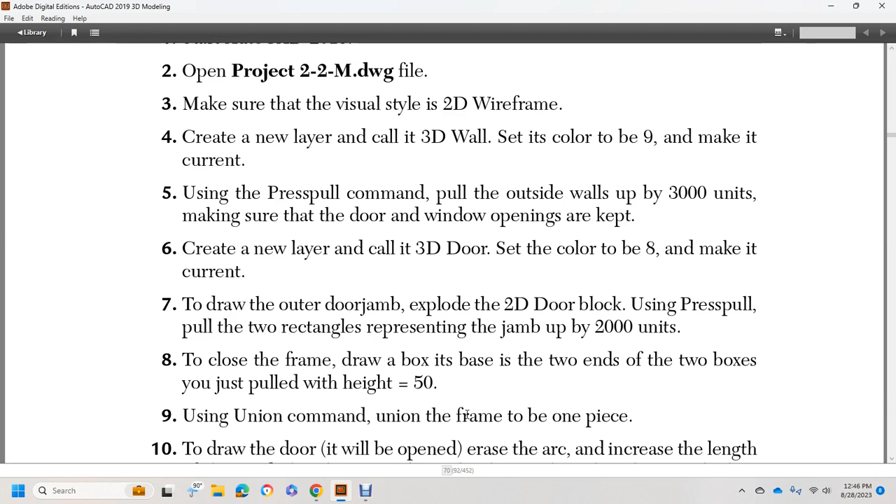Using the union command, union the frame to be one piece. To draw the door, it will be opened. Erase the arc, and increase the length of the inside line by 1 unit to make the 2 lines a length of 800. Draw a line closing the shape.

Use the press pull command on the rectangle, 2,000 up, creating the door. Make a layer of 3D wall current to close the gap between the door and the wall. Draw a box using object snaps. Using the union command, union the wall to one piece.

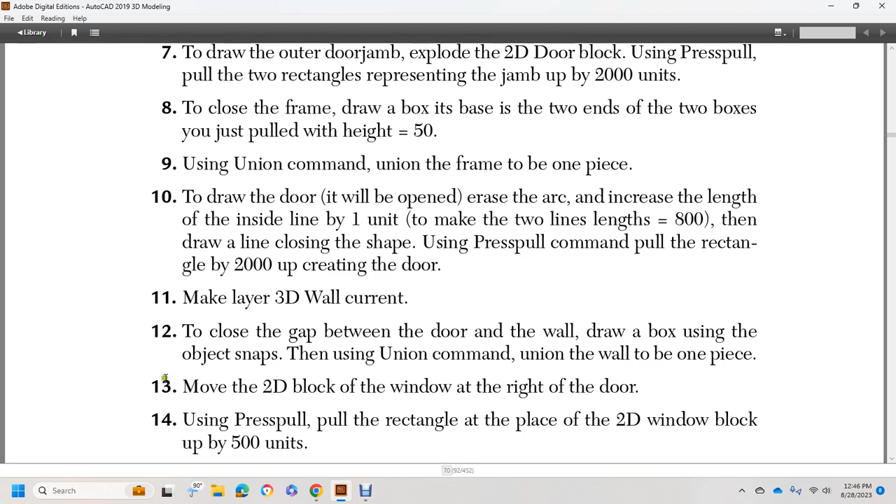Move the 2D block of the window right of the door. Using press pull the rectangle at the place of the 2D window block up by 500 units. Create a new layer named 3D window. Set the color to 8 and make it current. Explode the 2D block window.

Erase the inner 3 lines. Press pull the 2 rectangles up by 1900, creating the 2 boxes at each end of the height, and 50 to close the frame. Union the 4 boxes to create 1 unit, move it to the opening, and make the 3D wall layer current to create the box, closing the gap as done previously.

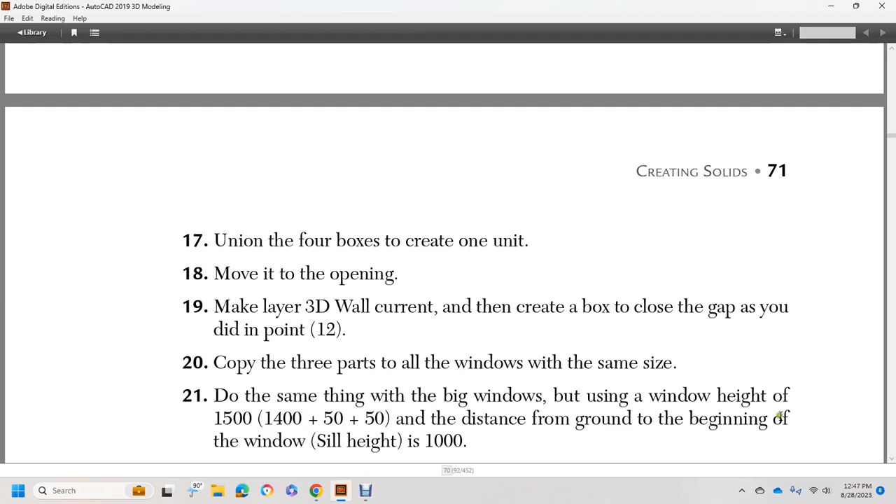Copy the 3 parts with all the windows of the same size. Do the same with the big windows using a window height of 1500, 1400 plus 50 plus 50. The distance of the ground from the bottom of the window is sill height of 1000.

Using the union command, union all the walls, freeze the layers for wall, door, and window, and create a new layer, 3D roof. Set its color to 8 and make it current. Create a wedge base of 2350 by 11,400 with a height of 2,000, mirror it around the longest dimension, and union both parts.

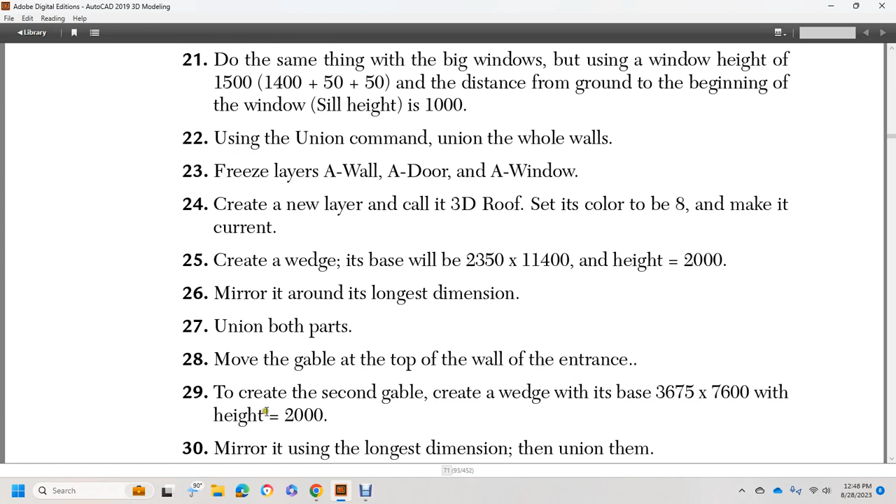Move the gable to the top of the wall of the entrance. Create the second gable with a wedge base of 3,675 by 7,600 and height of 2,000. Mirror it along the dimension, union them, rotate the gizmo to make it fit the part of the roof, then move the gable to the top of the walls.

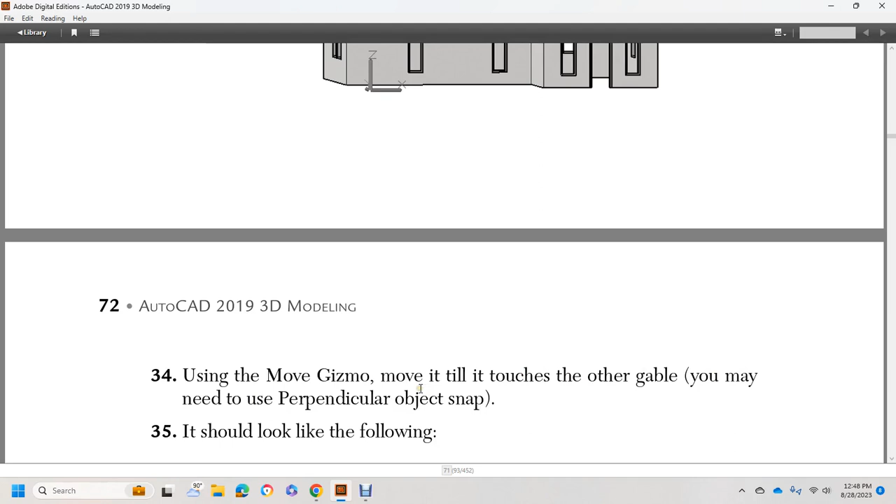Take and make the 2 gables meet closely, change the subobject of the vertex, and select the top vertex, just like the following. Now you have a house. Using the gizmo, move it till it touches the other gable, and you may need a perpendicular object snap. It should look like the following.

Create a new layer called 3D base, set its color to 8, then make it current. Look at the model from below. Using object snaps mode, create the box covering the area, house height with an overhang of 50, select the base and show the grips.

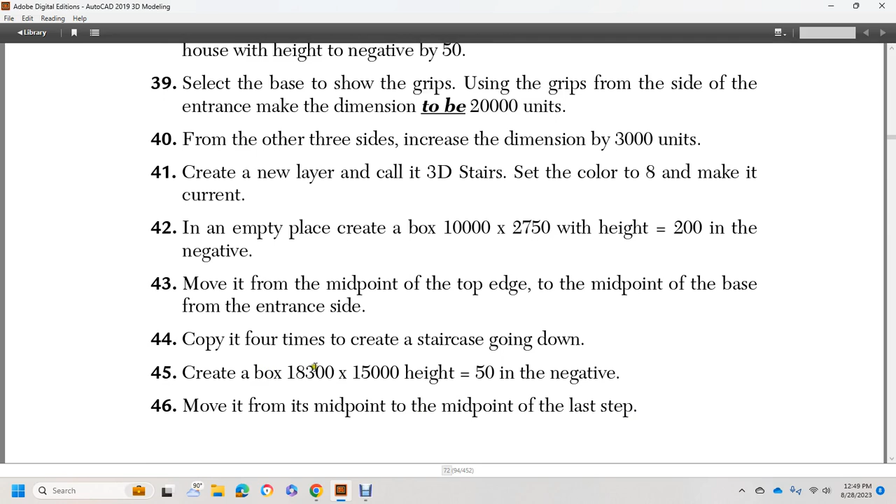Create a box of 18,300 by 15,000 with a height of 50 in the negative direction. Move it to the midpoint of the last step. Create a new layer called 3D entrance.

Select color 8 and make it current. Start the cylinder command, set the center point at the midpoint of the right edge of the last box drawn, set the radius to 500, and the height to 6,000. Move it to the inside of the file by 500 using the gizmo.

Copy it to the other side. Use the 3D OSNAP, copy it to the center of face to make a total of 3 cylinders. In an empty space, draw a box of 8,650 by 5,250 with a height of 900.

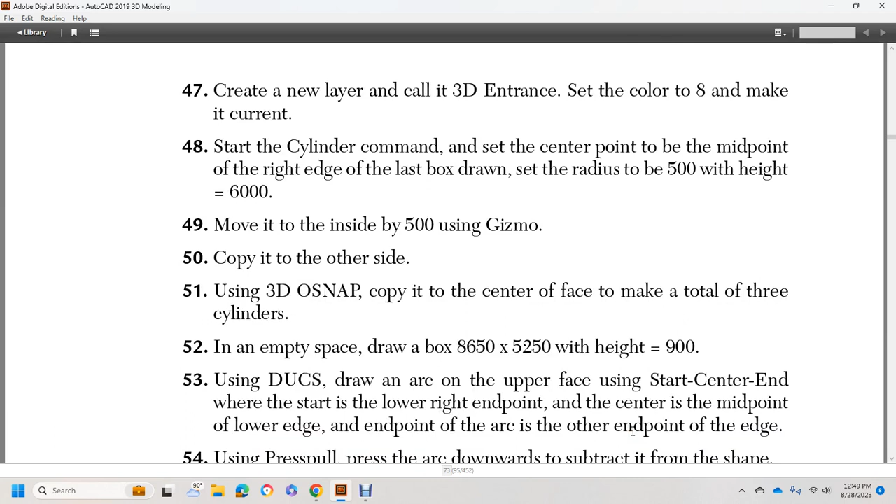Use the dynamic UCS. Draw an arc on the upper face with start, center, end: starting at the lower right endpoint, the midpoint of the lower edge, and ending at the other endpoint of the edge. Use press pull on the arc drawn downward to subtract it from the shape.

Use the gizmo to rotate the shape 90 degrees. Move the shape to the midpoint center of the cylinder. Copy it to the other side using both shapes. This is your final shape.

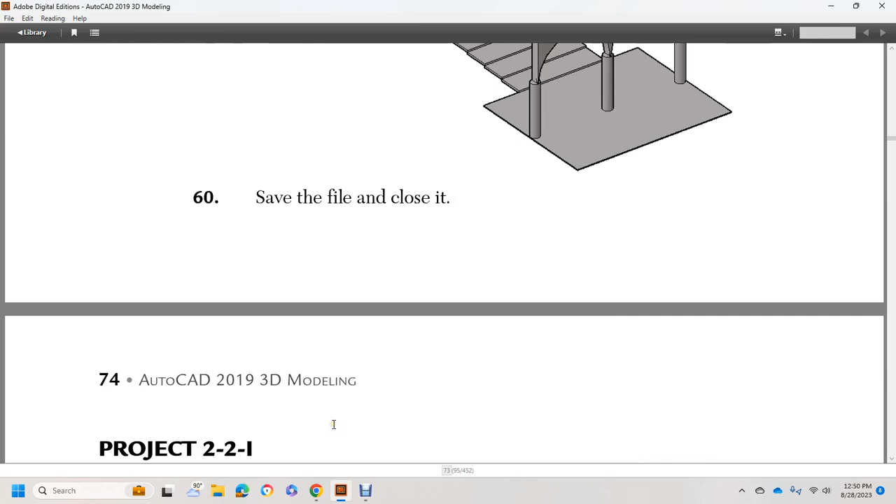Now we have a house with an archway. Save the file and close it. Alright, project 2-2-I.

That's another same thing, a house, but in imperial units.

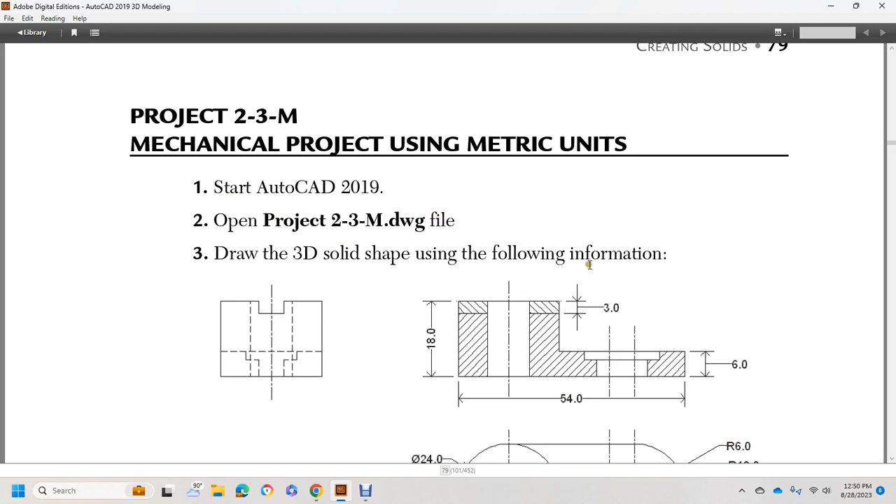Mechanical project, metric units, start AutoCAD 2019. Open project 2-3-M.dwg. Using metric units, draw the 3D shape from the following information, with missing dimensions on the top right image of the 2.

The final shape of the 3D model should look like the following. Save and close. Mechanical project using imperial units.

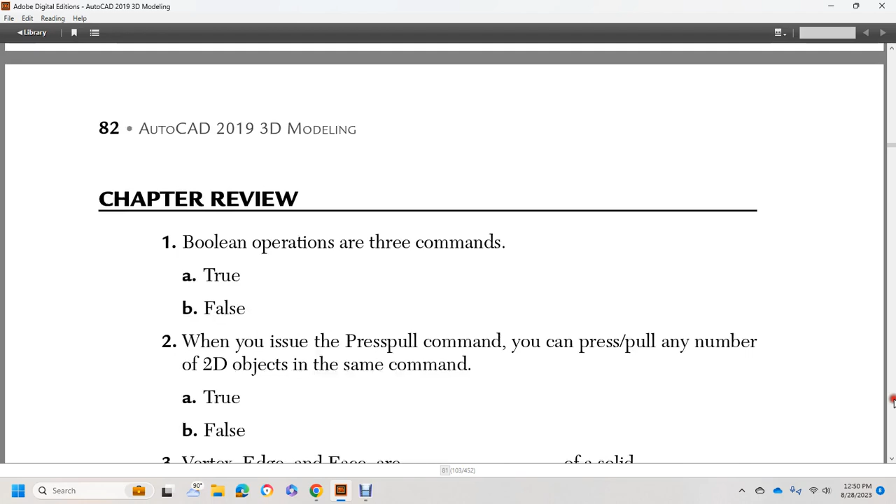Answers. Chapter 3, creating meshes.